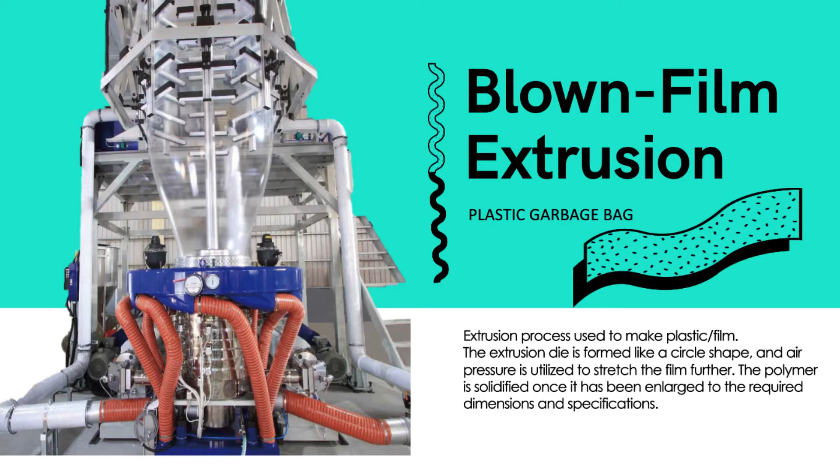Our topic is blown film extrusion. Extrusion process used to make a plastic or film. The extrusion die is formed like a circle shape and air pressure is utilized to stretch the film further. The polymer is solidified once it has been enlarged to the required dimension and specifications.

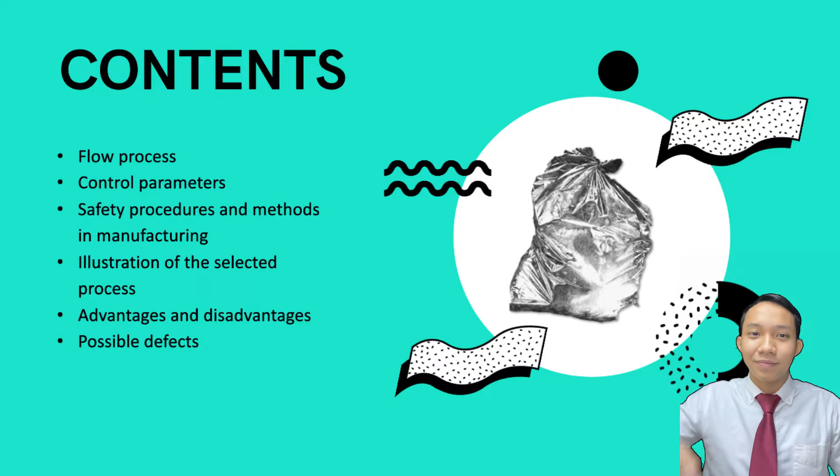These are the points that we are going to talk in this video presentation. This is the flow process for blown film extrusion. The first one is mixing. Various densities of polyethylene are mixed together to form a homogeneous mixture consisting of low density and high density polyethylene. These are usually in the form of plastic beads.

The second one is melting. The mixture is then melted in an extruder which melts the polyethylene around temperatures of 350 to 500 Fahrenheit. Next is pumping air. This produces a film of plastic which is polyethylene in the shape of a tube as air is being pumped vertically through it.

Then it passes through roller. Slowly, the plastic tube is cooled down and rolled into sheets by multiple rollers that will eventually form the plastic bags. And lastly, heat seal and cutting. After sheets pass through the rollers, the bags are made by heat sealing and cutting the rolls film. The machine that does this heat sealing and cutting does its job according to the measurements installed to draw out the required length of one plastic bag.

So, if it's small plastic bags, the machine cycle speeds can go as high as 70,000 bags per hour. But in cases of large polyethylene bags, it can go as slow as 200 bags in an hour.

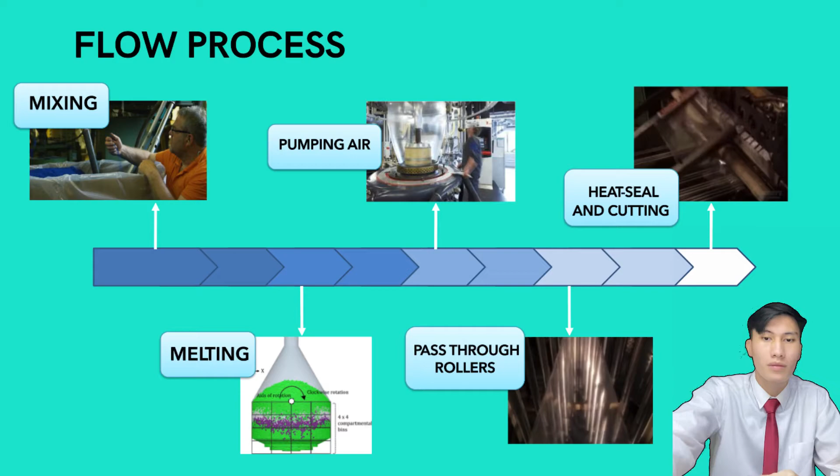So, this is the control parameters in the extrusion process. The first point is the polyethylene pellets are melted at 200 degrees and pressed. Then, the second point is the die land creates back pressure and decreases melt flow speed. The mandrel regulates die opening to control melt flow speed and the heaters control the temperature of melt. And at the tube, it has a minimum thickness of 37 microns and also a circumference of 51 centimeter.

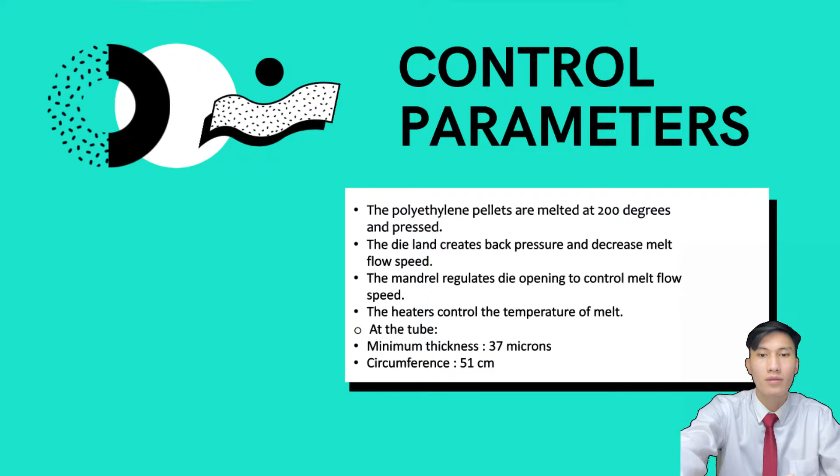And let's proceed with the safety procedures and safety method. We go to the safety procedure first. The first one is never wearing anything that dangles, such as necklace, bracelets, watches, rings or loose clothing to prevent limbs from getting trapped or pulled into the machine. Also, we must know the location of the nearest fire extinguisher and the nearest first aid kit. The most important thing here is never operating the machine without authorization and appropriate training.

And let's move on into the safety method. So for the safety method, the first point is height. Some extrusion, notably blown film, runs upward into a cooling tower. There may be places where tools or other loose objects can be left, and if they fall, can injure people or damage machinery.

The last one is pressure. Insulate melt transfer tubes and be aware of the danger of their breakage or separation when melt expands on reheating after full shutdown. And stay away from the die opening as much as possible.

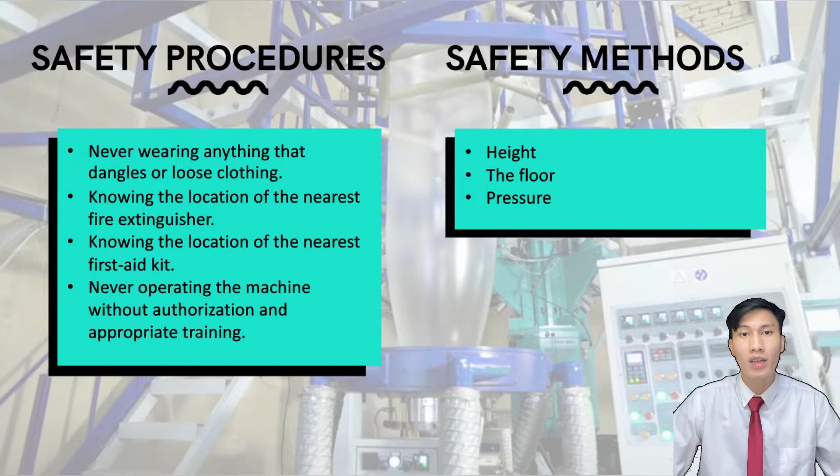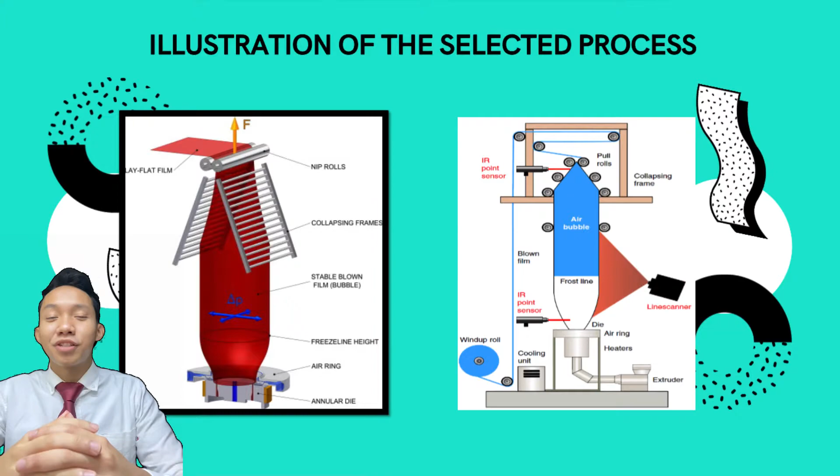This is the illustration for the blown film extrusion process. So, we move on to the next slide, the advantages. Blown film has a better balance of mechanical properties than other extrusion processes like cast or extruded films, because it is drawn in both the transverse and machine directions.

Mechanical properties of the thin film include tensile and flexural strength and toughness. The nearly uniform properties in both directions allow for maximum toughness in the film. In addition, a blown film extrusion die can make many different widths and sizes without any significant trimming. This high level of flexibility in the process leads to less scrap material and higher productivity.

Furthermore, blown films also require lower melting temperatures than cast extrusion. Measured at the die opening, the temperature of cast film extrusion is about 220 degrees Celsius, whereas the temperature of blown film is about 135 degrees Celsius. Furthermore, the cost of the equipment is approximately 50% of the cast line.

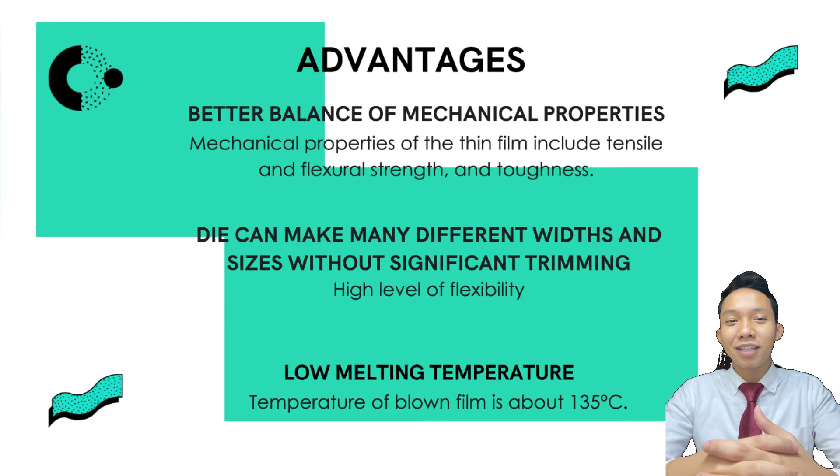Further, disadvantages: blown film has a less effective cooling process compared to flat film extrusion. Flat film cooling is done by means of chill rolls or water, which have significantly higher specific heat capacities than the air that is used in the blown film cooling process. The higher specific heat capacity allows the substance to absorb more heat with less change in the substance temperature.

So next, if we compare to cast film, blown film has a more complicated but less accurate method to control film thickness. Cast film has a thickness variation of 1 to 2% versus 3 to 4% for blown film.

So the resins used for casting typically have a higher melt flow index, which is the amount of polymer that can be forced through a standard die in 10 minutes according to a standard procedure. The melt flow index for cast film is about 5 grams per 10 minutes, whereas for blown film it is about 1 gram per 10 minutes. Consequently, the production rates for cast film are higher.

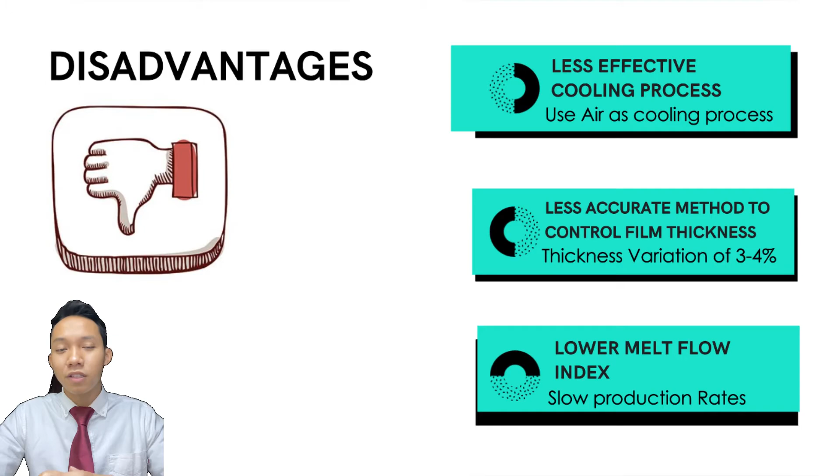We proceed to the next slide, which is defects for blown film extrusion. So, what are defects? A defect is any form of deviation of the product's characteristics from the specification set up by the manufacturing process. It can be caused by a single source or the cumulative effect of several factors, which may arise at any stage of the processing.

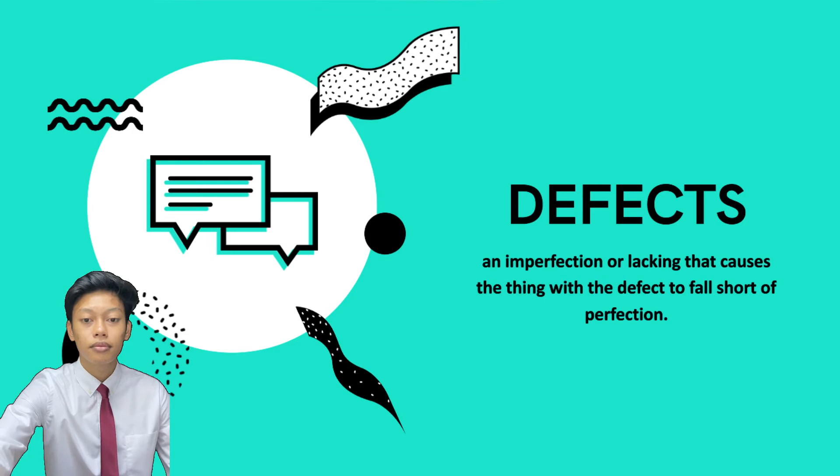Resin defects are a type of defect that can occur during the extrusion process, due to resin contamination or a chemical reaction in the extruder that may generate gases. If moisture induced in the resin is not removed by an atmospheric or vacuum vent, it exits the die as steam and causes holes in the product. It can cause surface flaws on the extruded part.

Next is poor mixing. Cooling is provided to prevent resin or additives from prematurely melting and sticking to the feed throat. Uniform heating around the whole die, transfer pipe and adapters is critical to guarantee consistent polymer flow out of each die hole. If fans or other cooling devices are blowing on one side of the die, this can affect melt temperature. This impacts product quality and can create clogging in the extrusion.

Last but not least, overheating. Melting occurs in a single screw extruder primarily as a result of shear heating of the polymer. Shear heating is the result of a polymer-filled screw rotating within the barrel. Overheating may produce degradation of the polymer material that is used or make dimensional control and sizing difficult. And it can create problems in the cooling of the product.

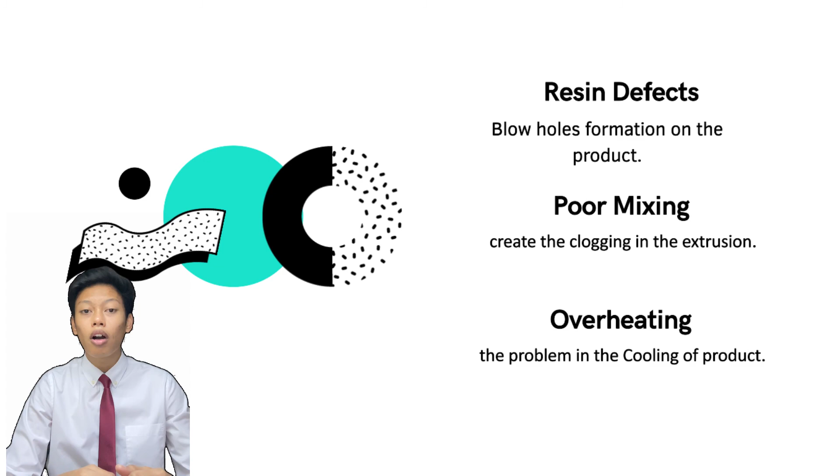To sum up, the blown film extrusion process is widely used around the world for the production of plastic bags. Companies in Malaysia itself, such as Ecoplast Sendirian Berhad and Tiong Chuan Plastic Sendirian Berhad, are examples of manufacturers that apply this extrusion process. Due to its high production rate, it becomes the most promising process to produce plastic bags.